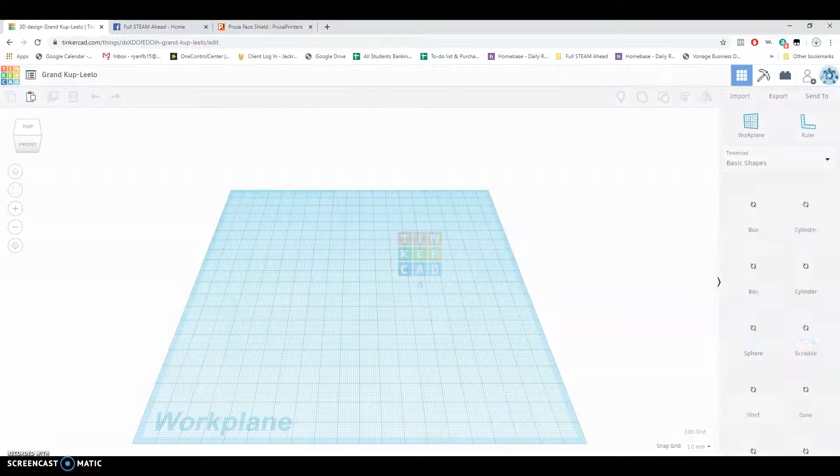Head back over to Tinkercad. I'm going to create a new design here and import my STL file. Oh, I downloaded the wrong type of file, I did the 3MF, I need the STL. Let me try that again. There we go.

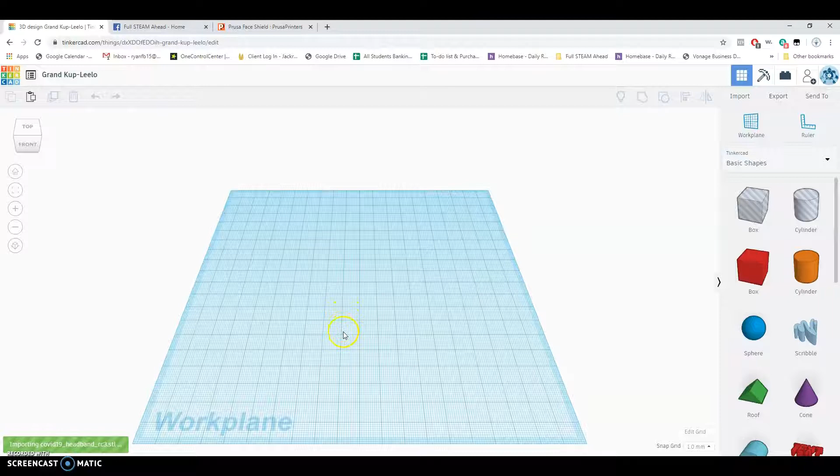And import. Now, first thing you'll notice is it's a pretty large file. This has to fit on someone's head, so it will probably barely fit on our work plane here, if it fits at all. But we can also fix that.

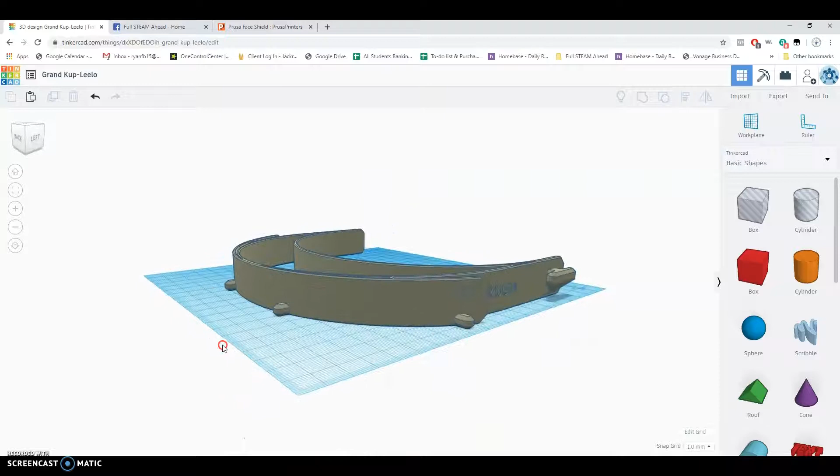There you go, so you can see the design, and you can see it's got two main components here: it's got kind of the inner strap, which rests against the forehead, and this is the outer strap. There's a gap here because that allows for doctors to be wearing goggles and ventilator masks or N95 masks, so it gives a little space for that to be an additional barrier.

Over here it's got the bungee strap, which goes around the back. We obviously don't 3D print that part, well, you could, there's elastic stuff, but this is going to be our goal: to design something along these lines, customized like we had done before for local area hospitals or whomever.

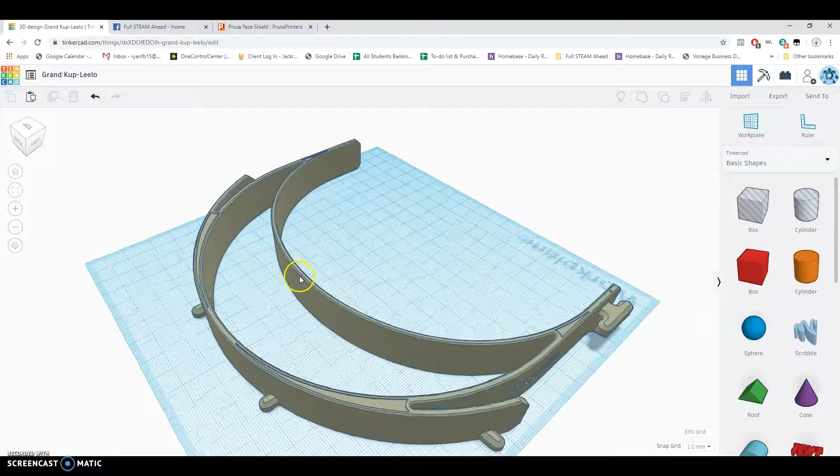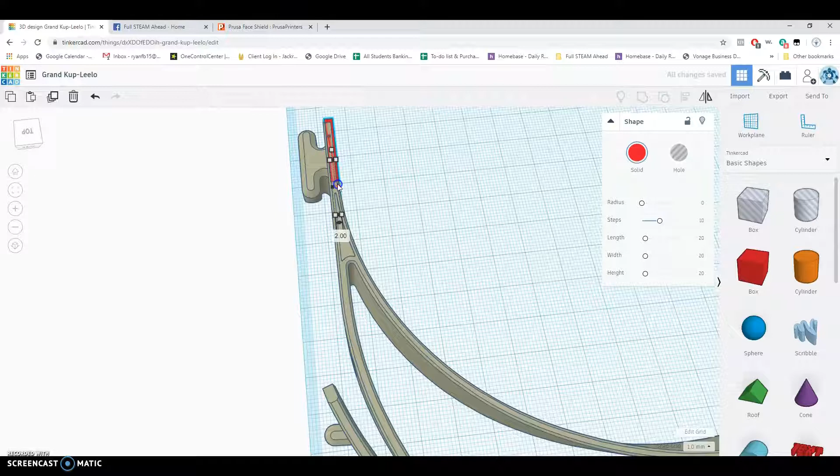So first things first, we want to take a look at and pay attention to some of these shapes and sizes. You can see the thickness of these, it's kind of hard to tell, but I'm going to guess about 1, 2, 3, 4 millimeters. Let me see if I can use this box as a comparison there.

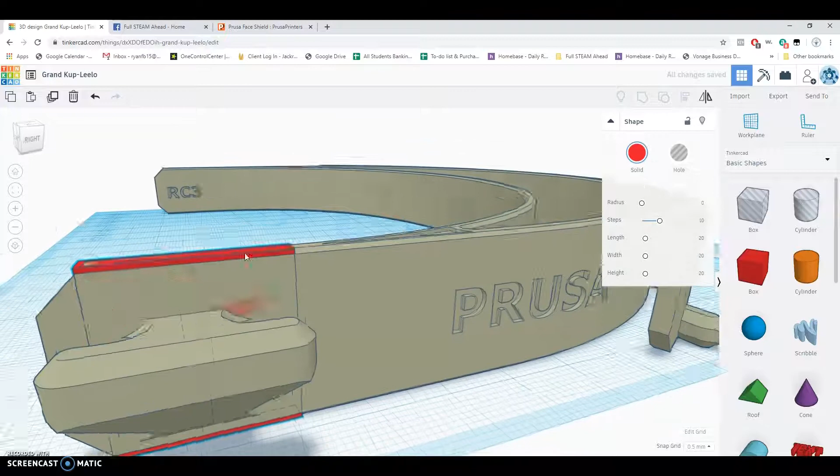Actually closer to 2 millimeters. Looking at this one here, it's 2 millimeters wide. I'm going to bring this down to 0.5 millimeter so I can really get the width dialed in, because I want to try to get it as close as possible. These do have to be somewhat flexible, so it's important they're not too thick, because otherwise they won't really work. There you go, that's exactly... wait, is that right? No, 2.5 millimeters.

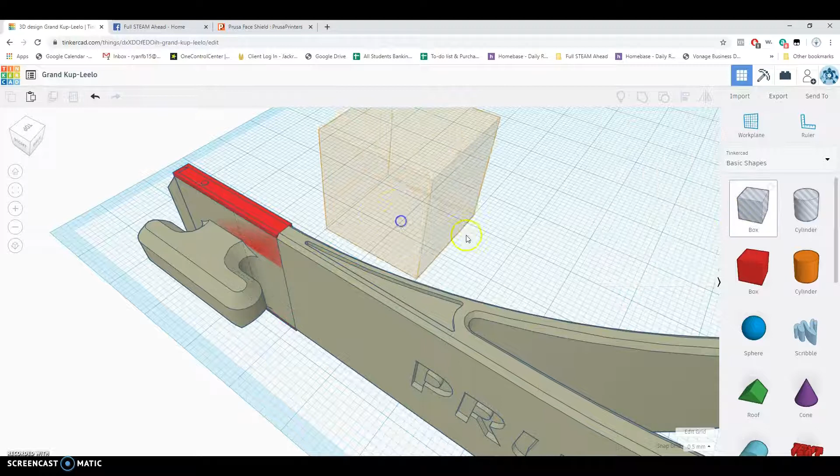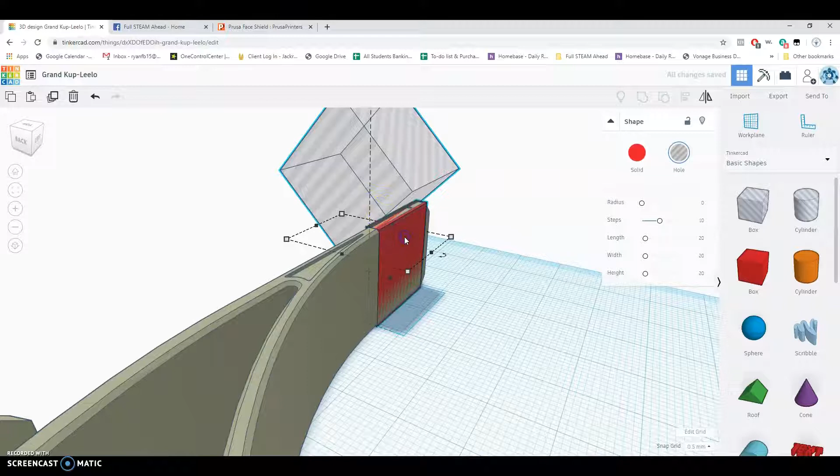Sorry, 2.5. Also notice the beveled edge here, that just makes it so we don't have sharp edges, and when people are wearing these on their face we want to avoid those sharp edges too. We can create a beveled edge by taking a block like this, rotating it at 45 degrees, bringing it on up here, moving it up, there we go. And let's group these two things together.

And there we go, I've got that beveled edge now. So this is my base piece here. I'm actually going to keep that piece around because I might end up using that. Now the rest of these pieces are going to be a little more complicated to build.

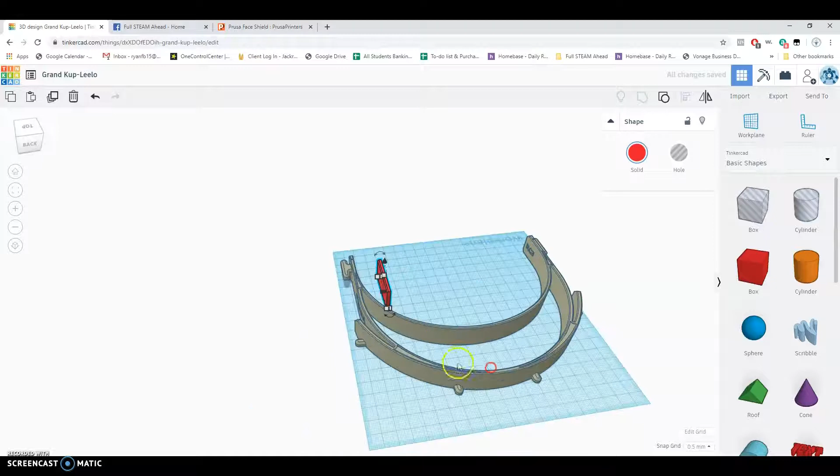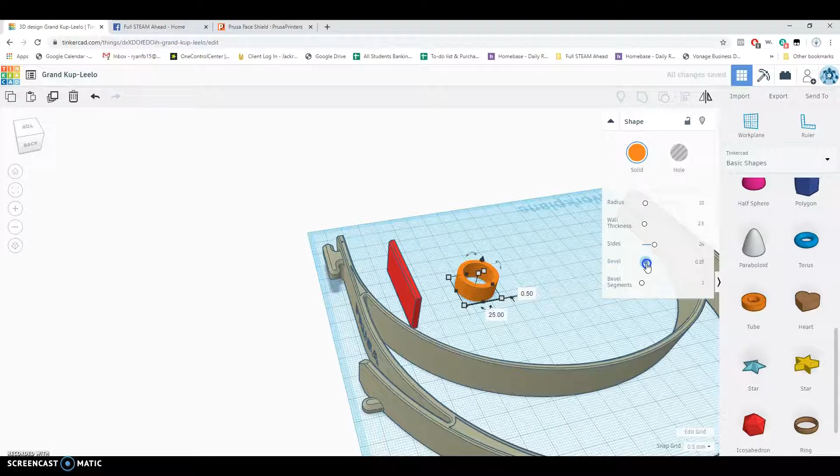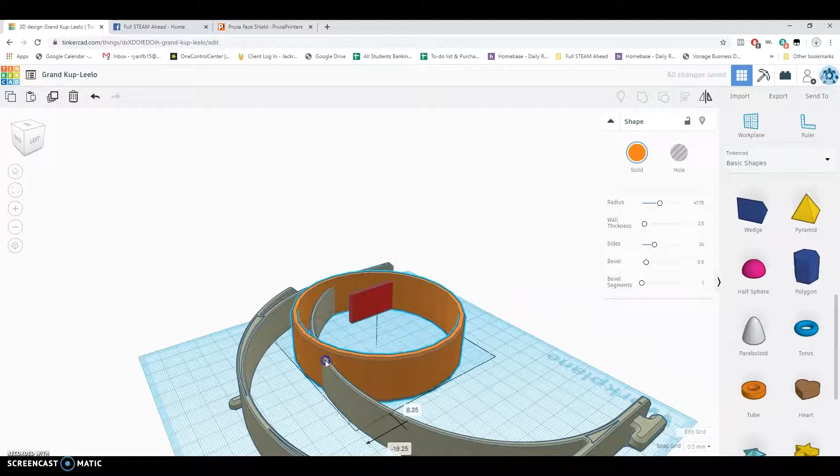You can start with the cylinder, or there are some in the shape generators I know are there. My idea was to use the tube here because you can control the radius and the wall thickness of the tube. In fact, check it out, 2.5 millimeters, that's exactly what we need. You can also add a bevel, which will help, so we can add that bevel. This tube tool right there on the basic shapes page is probably a good place to start. Now let's increase the radius quite a bit, and we can increase the height quite a bit, and my goal here is to kind of match the size of this one and go a little bit bigger.

And you can see that it's not exactly a half circle there. Let's see if we can go a little bit bigger. Find the right size and shape there.

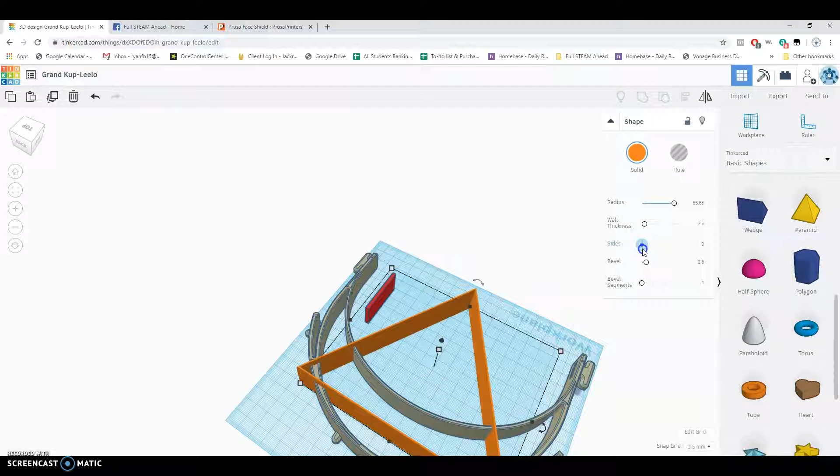You can also increase the number of sides. That just makes it appear rounder. I don't know if you guys can see that happening. If I go down, it makes it fewer sides, the less circular it looks. The more sides, the more circular it looks. There we go. It looks pretty good.

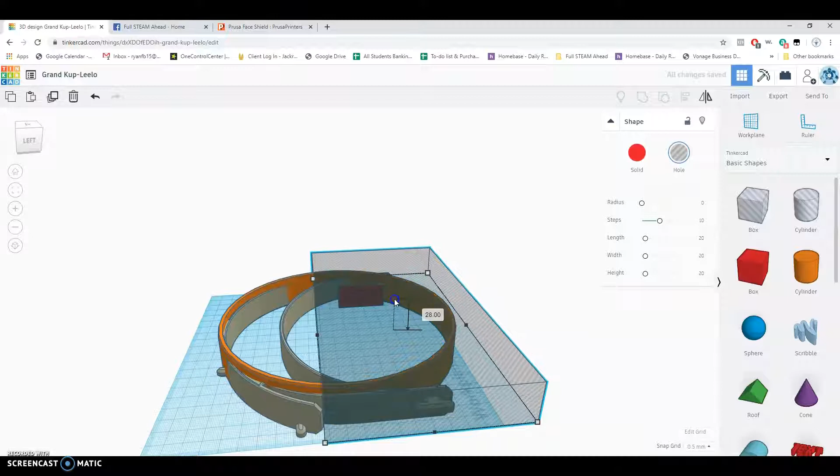So we're going to go with that, and then we're going to go ahead and trim half of that off. To about there. Let's see. And group those together.

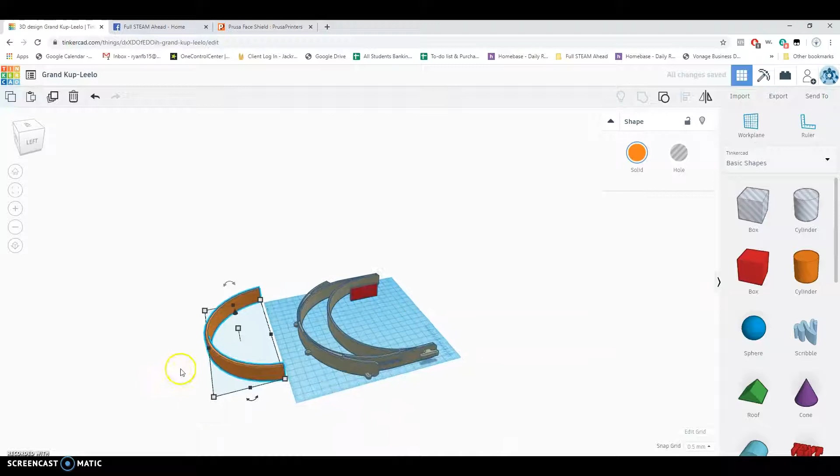My height's a little too tall. Bring that down. There we go. Now we're starting to get somewhere. And this can actually be duplicated for this piece and that other piece back there. So I'm going to go ahead and duplicate that. Now I've got two of them.

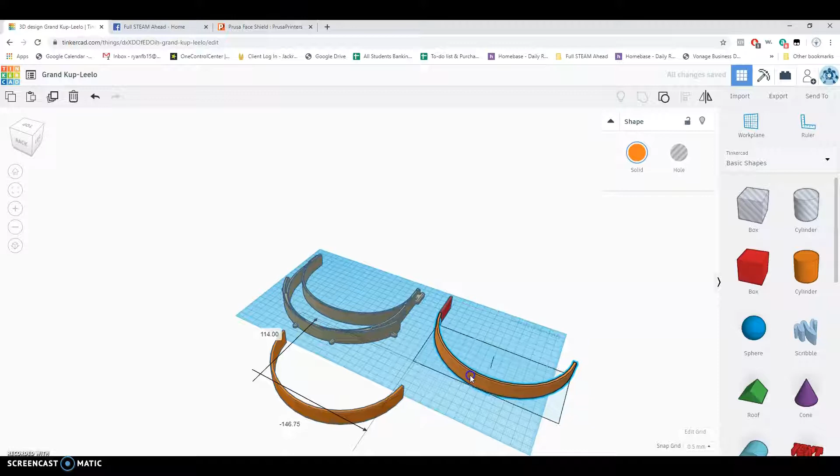The other thing I'm going to do over here, I can edit my grid. I'm going to make it 400 by 200. That way I've got some room to work here. It doesn't really matter if you're off the grid, it's kind of an aesthetics thing. But you can see what I'm trying to accomplish here.

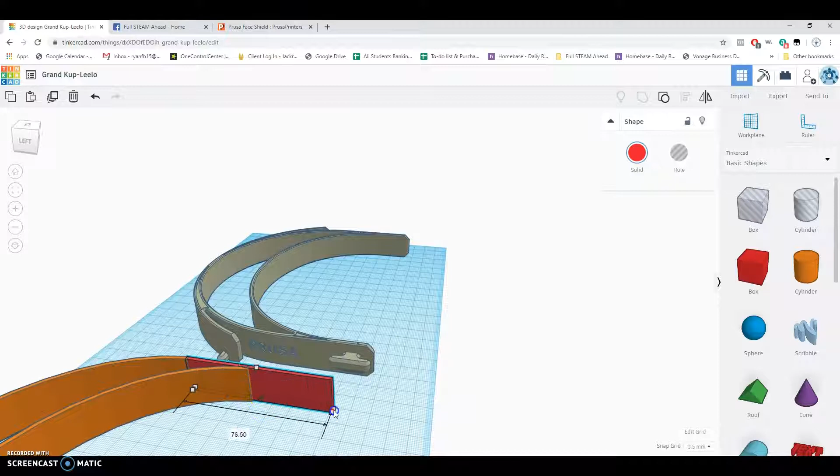We'll have to get those matched up as well. So let me extend this piece out and duplicate it. Move it on over to this side. And I press F to focus on it, make sure that gets lined up. Actually, I want to rotate it because it's beveled on the wrong edge, although probably should bevel both edges before I'm all done here.

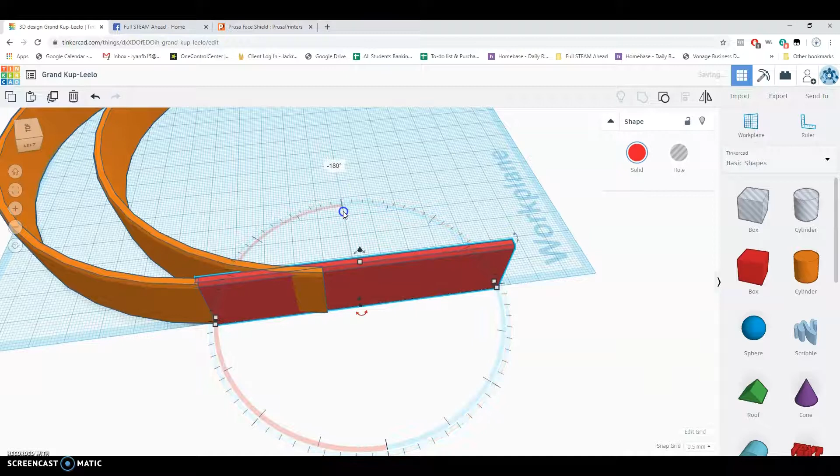There we go. It's starting to look like something here now. Perhaps those are a little too long, and I'll just fiddle with that a bit.

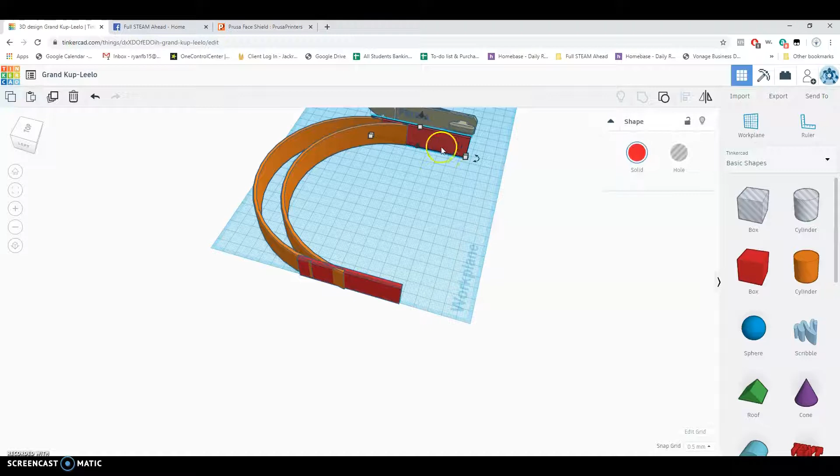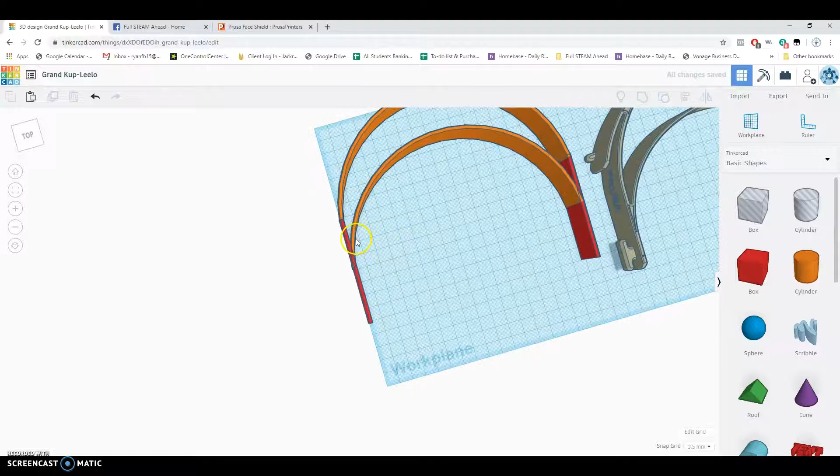Oh, how long is this one? I want to make sure they're the same size, 75. And I'll just type it in, 75. So they're the same. And this probably needs to be moved forward so that it matches up on the edges there. And whatever this thing's doing, not in the right place, I'm just using the arrow keys. And I can't even, it'll end up warping the shape a little bit. But that looks pretty good there.

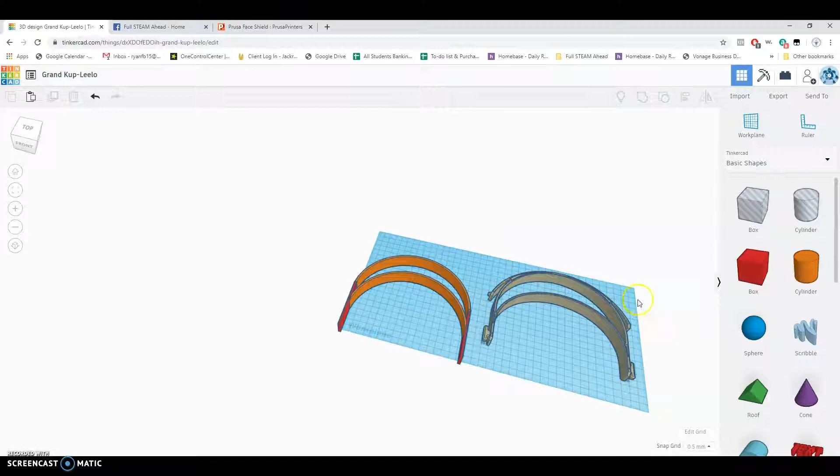Now you'll notice a wider, it looks like less than a third of a cylinder there, a third of a ring. We could certainly add that part too.

Let me group all this together so that it's easier to see how it's all going to compare here. Oh, no, I don't like the blue. Matches the platform too closely. There we go. We'll do a green one, because why not?

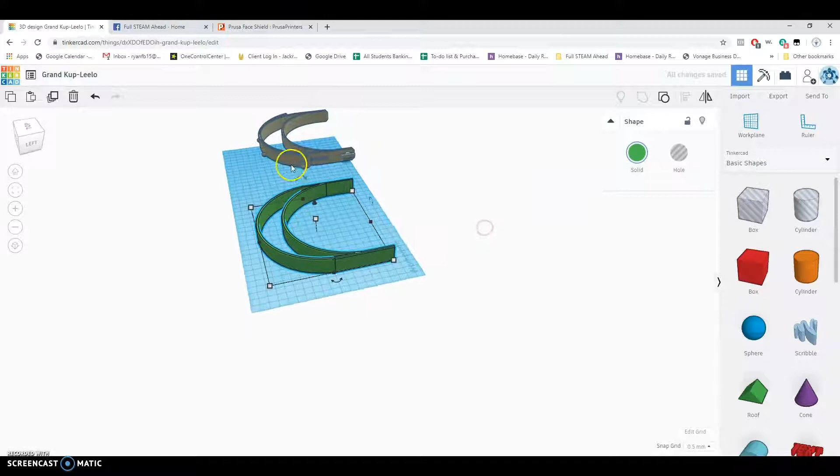Now, a couple other important components that we're going to need to build here. And we have to, since we're 3D printing, we have to pay attention to a couple things. So after we add this other ring here, these little pins there, you can see up at the top, they hold the plastic face shield part in place.

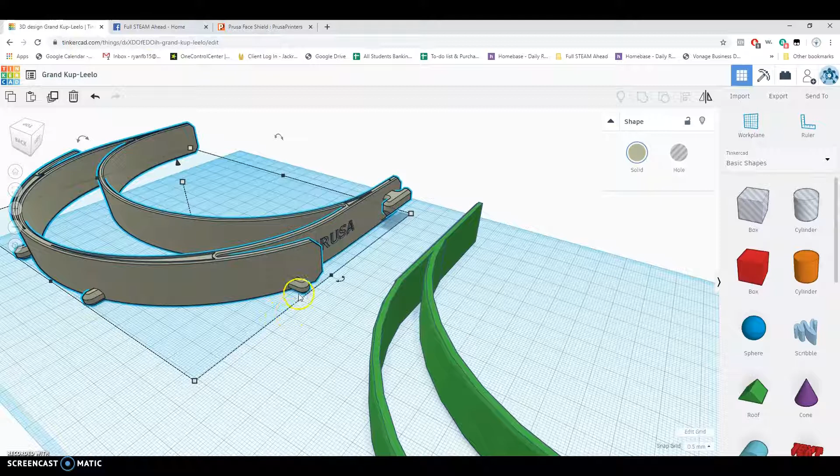And they're designed so that these two face forward and these two face 90 degrees to the right. They're also kind of rounded and beveled. We can use a couple different tools for this. A paraboloid might do the trick. A cylinder with a sphere, a half sphere on top might do the trick. There's a few different ways we can take that.

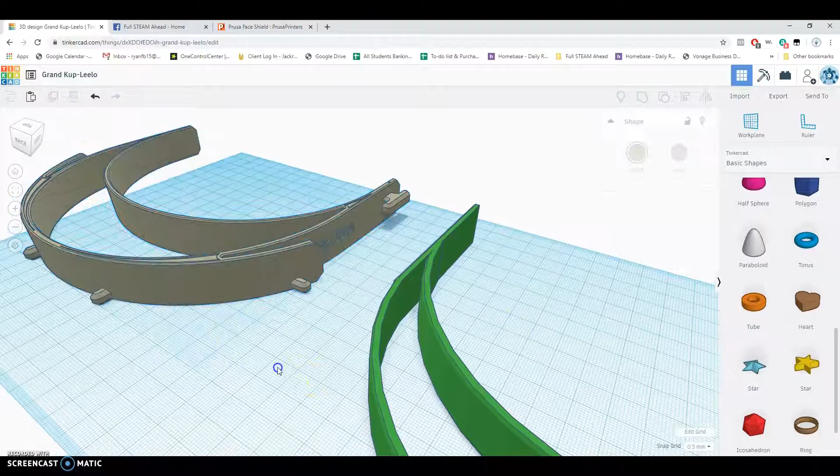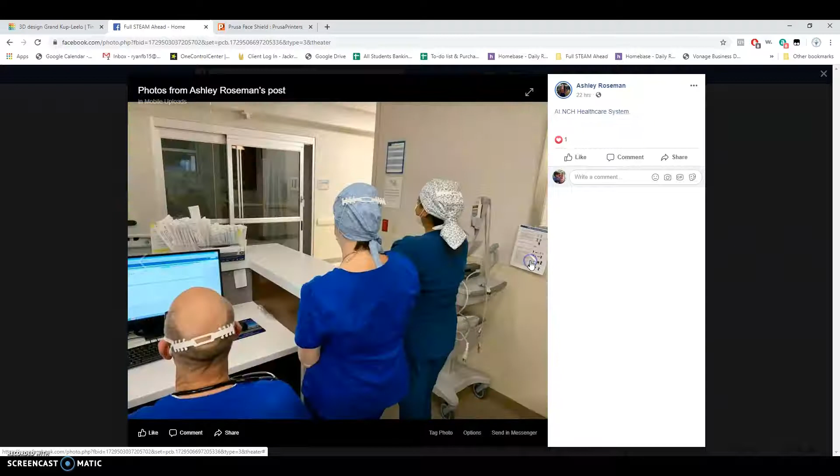In addition, this, as I mentioned before, is the head strap holder. So we would attach, and let me see if I can find an example of what that would look like. I don't know if you can see. Well, anyway, it attaches around the back of the head there, and it'll hold the mask in place. So we need something to tie it to.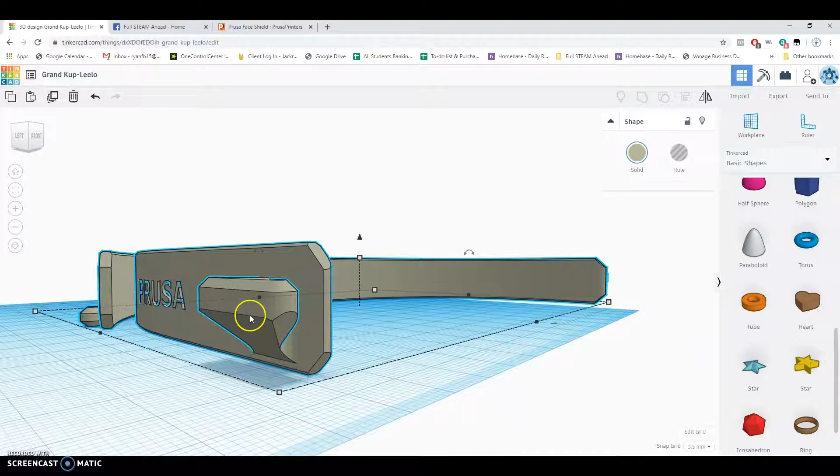You'll notice that, and let me focus on this piece for a second. You'll notice that because of the way 3D printers work, this is angled out like that, right? Because if I had it straight across, like the top is, then it wouldn't 3D print very well, because 3D printers can't build straight out. They build out on an angle just fine.

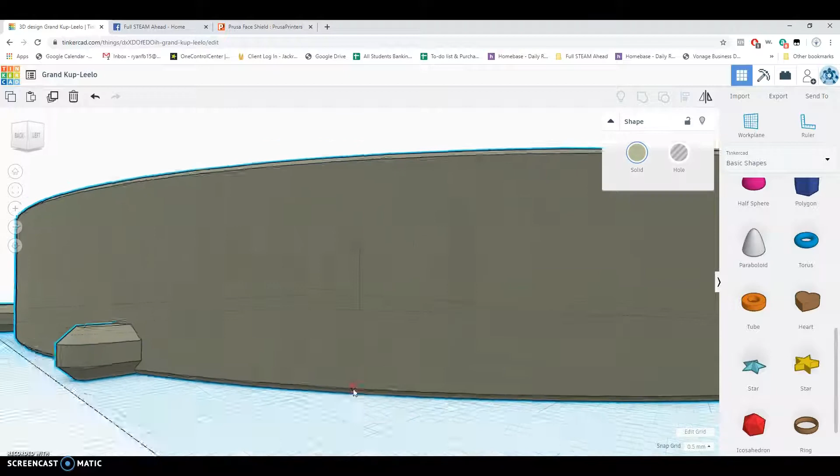Same thing kind of down here. These pins are actually attached to the ground, and then they build out on an angle instead of being straight across. Those are important considerations as we're building this for 3D printing. You can bevel the bottom edge as well, but again, we don't want too extreme of an angle with that bevel.

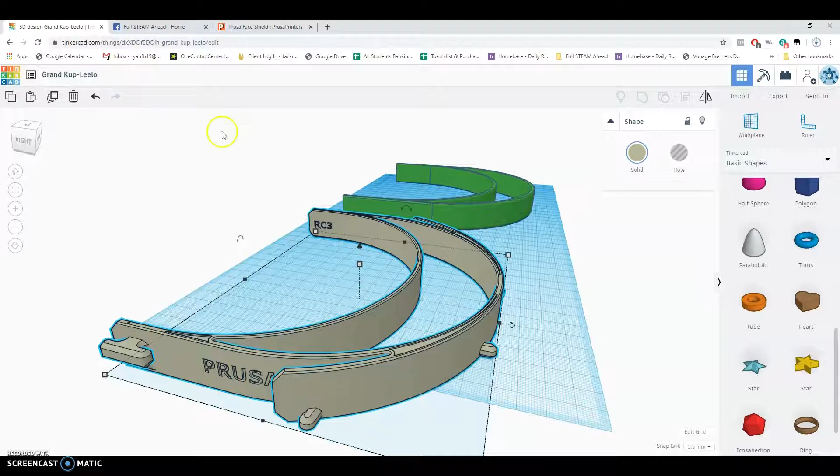And then we're looking for some customization with them as well. You know, your calling card is not going to be Prusa. That's the guy who invented a style of 3D printer. That's let's see if we can find. No, maybe not. Anyway, but you can put your own name because you'll have made your own model.

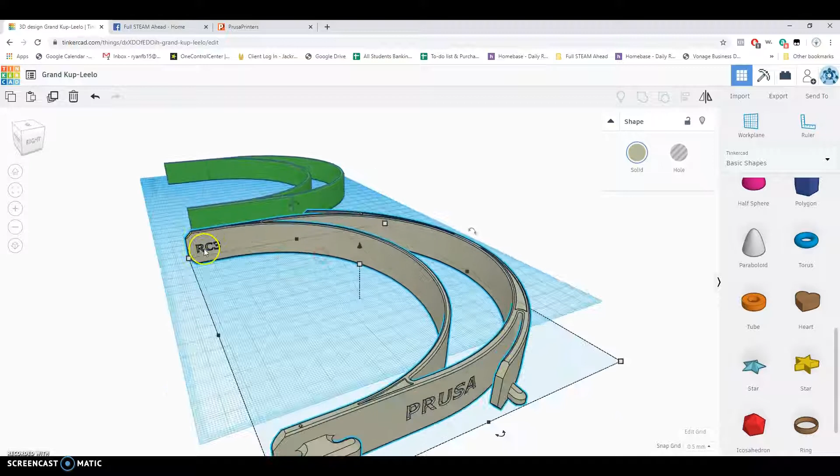You can put your own model number. You can put special messages to nurses, doctors, medical professionals, like we had done in the last one. We can kind of embed little things. Now remember, you don't want those to stick out because that'll be sticking into their face, the side of their head. That's not comfortable. But if you were to put inspirational messages there, that would be a great idea too.

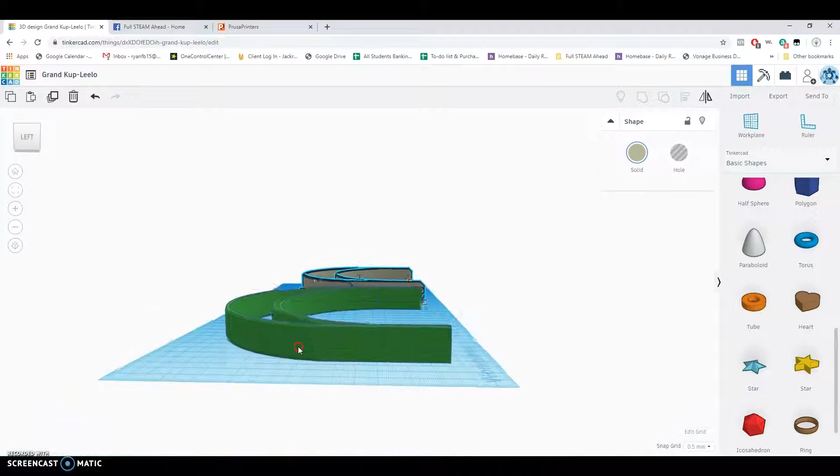So this project, the degree of difficulty is a little higher, but certainly it's something that, with your growing skill set, you guys, I feel confident you'll be able to tackle this and make something worthwhile.

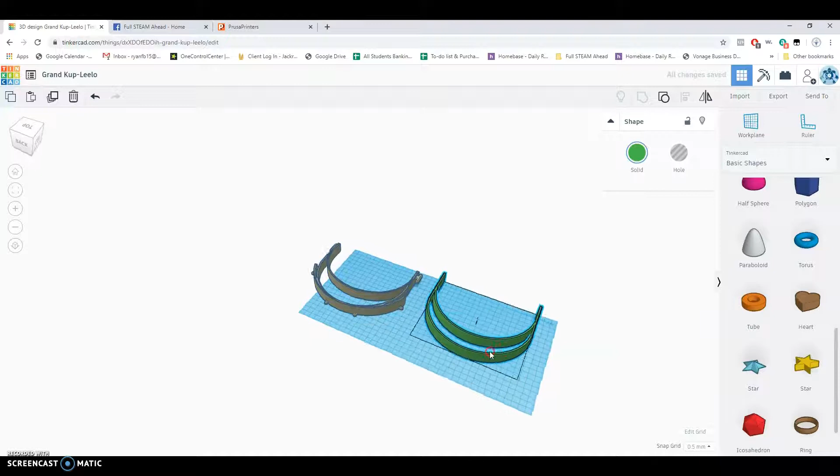Might just need to stretch the whole thing out a little bit like that. And mine's not exactly like theirs, but that's okay. It doesn't need to be exactly like theirs as long as it fits the basic requirements.

So there we go. That's our project for this week. Get started soon because there will be some things that you'll need to pay attention to along the way. Some things you might need to work through. Don't wait till the last minute. Have fun.